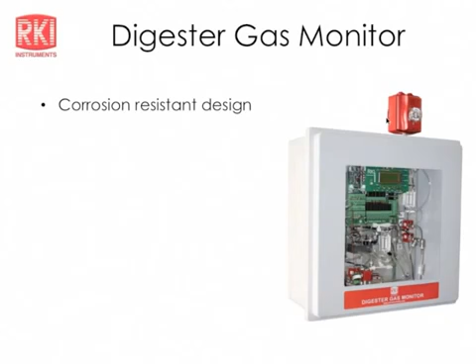So we're going to go through a PowerPoint presentation. You should be able to see that and also see an image of the inside of the digester monitor. We're going to use that to point out some features and benefits as we're going through the PowerPoint presentation. You can see from the picture and also on the screen that it's built into a NEMA 4X box, so it's very corrosion and water resistant. A lot of these applications will be nasty environments.

The main design work on this product was the sample system. The problem there is that many of these gas streams that you're going to be analyzing have very high humidity and high temperature. So a big part of the challenge in the design was to be able to handle those conditions. And I'll go into that in more detail later. We needed to accurately measure very high levels of H2S, much higher than we're used to in safety applications, up to thousands of parts per million.

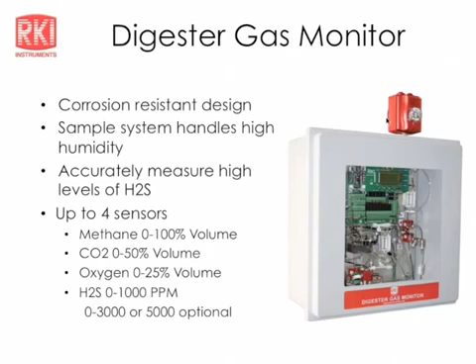And we designed it so that you could have up to 4 sensors installed, including a methane sensor for up to 100% volume, a CO2 sensor up to 50% volume, an oxygen sensor, and then an H2S sensor with 3 ranges available, 1,000, 3,000, or 5,000 ppm. And what we found is that typically the gas coming off of these digesters is around 60 to 70% methane, mostly CO2 as the balance, and then a small amount of H2S. It's large to us, but small in the total percentage of the sample.

We use an aspirator to draw the sample. It can actually draw very long distances, but because of the high humidity in the sample, you generally are going to want to have the monitor as close to the sample point as possible to avoid getting a lot of condensation in the sample line. We have a self-draining moisture trap as part of the water protection system. There's an automatic back flush of the sample system so that if you do get any contamination in there, it'll get blown back out at the end of the cycle.

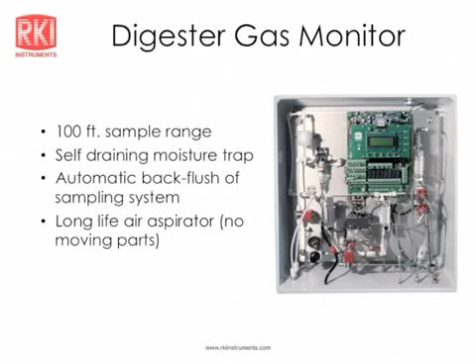I mentioned we use an aspirator rather than a pump to draw the sample. An aspirator is just a mechanical device that you pass compressed air through to create a vacuum. And it's much more durable and long-lasting than a pump would be, especially with the harsh environment we have to deal with. I mentioned before it has a NEMA 4X enclosure, so it's very weather resistant.

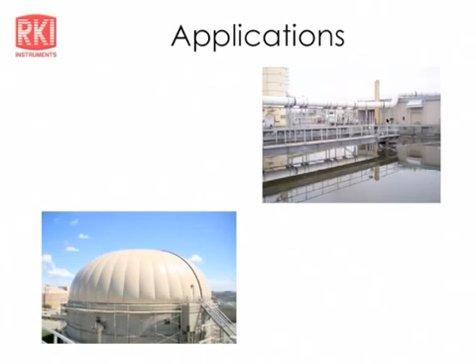Some of the applications that we're looking at, the primary one is for digesters in wastewater treatment plants. And the bottom left image is an actual digester. That dome is actually a dome within a dome. Inside that outer dome, there's actually a membrane that can expand and contract as it fills up with gas. We'll talk a little bit more about that process later. So wastewater treatment plants is a primary application.

Landfills, dairy farms, large-scale dairy farms, and also other animal farms. And animal farm lagoons, which is a nice sounding thing, but it really isn't. It's basically a lake of animal waste that they cover with a membrane and then recover the methane from inside that membrane.

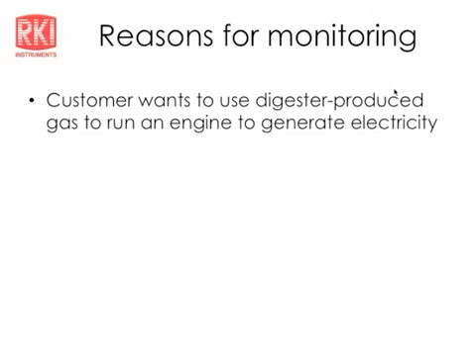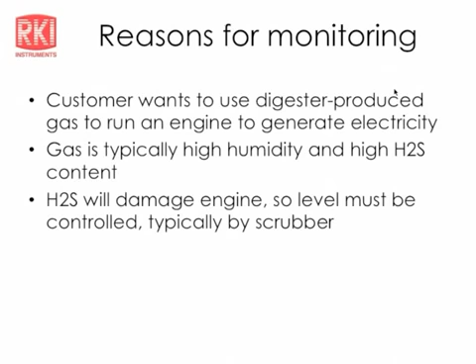So the reasons for monitoring, of course, this is all related to recovering the gas and using it to create energy. So the customer wants to use this gas to run an engine to generate electricity. And this gas is, as we mentioned before, typically very high humidity and high H2S content, which makes it very corrosive. The H2S will damage the engine, so you have to control and remove the H2S. Typically, they'll do this with some type of a chemical scrubber.

And the customer may want to check H2S both at the intake to the scrubber and the exhaust from the scrubber. At the intake so that they know what's going in, because the scrubber has a certain capacity. And if it gets too high, they may not be able to scrub adequately. And I'll talk a little bit more about that based on our experience at our beta site.

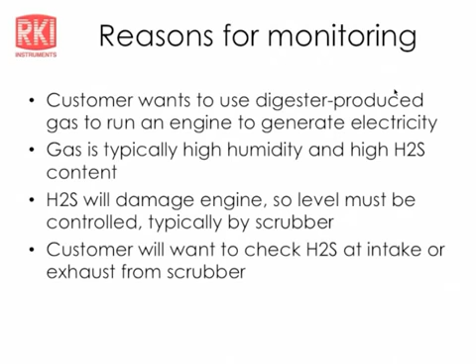They may want to measure the methane level. We originally thought that was the primary reason, but we've found that H2S seems to be the thing that they're most concerned with and most wanting to be able to monitor. But they can measure the methane level also, so they know the quality of the gas and whether it's adequate for running their engine.

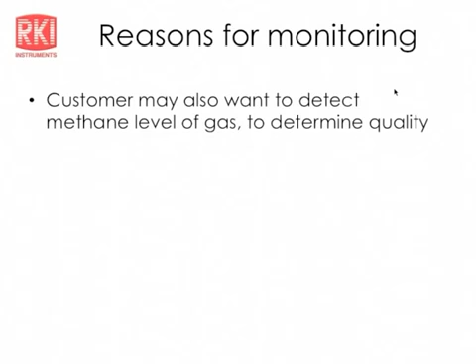They may also want to detect oxygen to prevent an explosion. If oxygen gets into the digester gas, of course, you've got a flammable gas normally with no oxygen. If you get enough oxygen in there, you can have an explosion. Also, if oxygen starts showing up, it could be a sign that their digester is not working properly, and that can be a problem for them. And then if there's air getting in, that can also be a problem. It could be a breach of the system. And again, it could lead to a flammable situation.

You can also measure the CO2 level. Again, we have that capability, so we put it in. I'm not sure how interested all the customers are going to be in that, but we have that capability, and that's the other primary gas that's going to be in the digester gas.

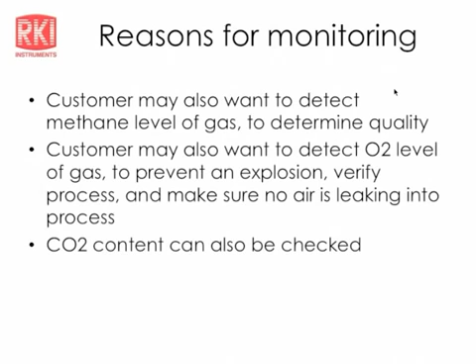Some of the features and benefits. This is the primary one. We know that there are a lot of people that have tried to use more conventional equipment for this application, including us, and it just won't hold up because of the environmental conditions of the gas. So we have a 3-stage moisture humidity control, and I'm going to point that out with a pointer.

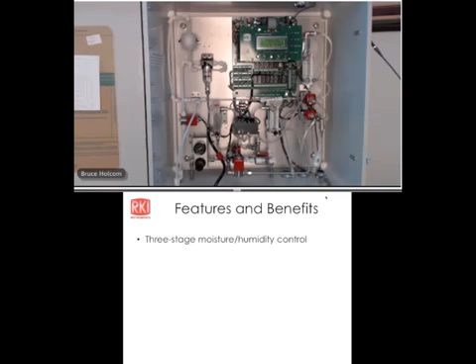And then the third protection is a hydrophobic filter, which, if somehow any condensate makes it past the other traps, will stop it from getting into the sensors and the rest of the system. And I mentioned we have a beta site. They've had their system running for almost a year now, and they've had absolutely no trouble with any kind of moisture problems. So we think the design is doing what it's supposed to do.

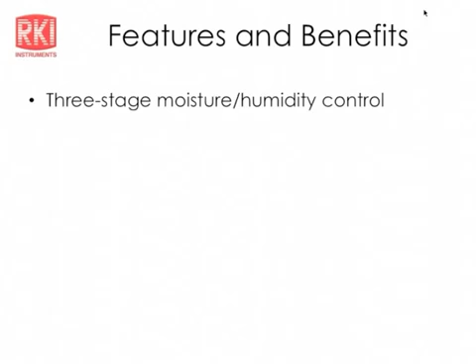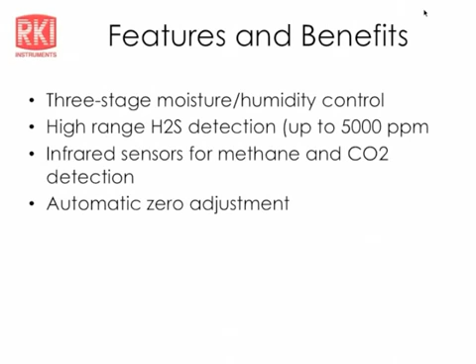As I mentioned before, we have high range of H2S detection up to 5,000 ppm. We use infrared sensors for methane and CO2, so they're not damaged by this bad environment that the sample is producing. One of the really good features about this is an automatic zero adjustment. Every time a sample is taken, the first step is to flush the system with fresh air and zero it, so you have very good zero stability.

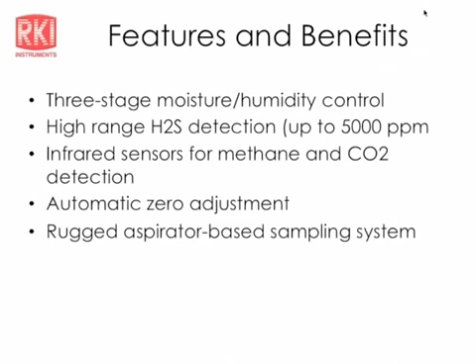I mentioned before the aspirator provides the sample, so there's no pump, no moving parts. Again, very durable and should be a long life system. We do have an option for a horn strobe on it. On the data sheet that we'll pass out later, it shows it with the horn strobe, which can be mounted on the top. I don't know how many people are going to need it because this is really not a safety device. It's not generally an alarm situation. They just want to get the data so they know what to do about their process if it gets out of whack.

You have a user adjustable cycle interval from 15 minutes to 24 hours. And I'll talk a little bit about that. Because of the nasty environment, the H2S and the oxygen sensors will not hold up if they're exposed to the gas continuously. So the whole design is based on a cycle where the cycle starts, it brings in fresh air, makes a zero adjustment. Then it takes a sample, and at the end of that sample time, it holds the reading until the next sample comes.

Then it does a purge to flush out any gas that's in the system, and then it does a back flush to blow air back through the sample system to blow out anything that might have accumulated during the sample time. And again, at the beta site we've had absolutely no problems with that. We've never seen any accumulation of anything in the system. The digester process tends to not be very dynamic, so every user that we've talked to has not had a problem at all with the fact that it's not a true continuous monitor.

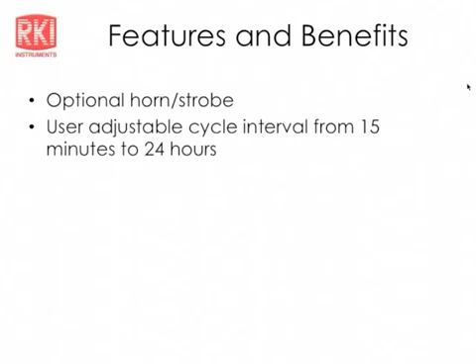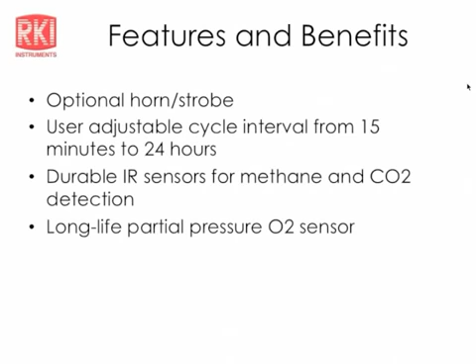The prices might seem high, but let me give you an example of why this is very, very valuable to any wastewater treatment plant that's running a digester. The guys that have the beta site, right before we delivered the system to them, they had been taking samples periodically with Draeger tubes to check the H2S going into their scrubber. And they didn't do it often enough.

And their system got out of whack. Normally they generate anywhere from 50 to a few hundred ppm of H2S. That's kind of normal if everything's working right. Their process went out of whack, and they got up to, they think, about 4,000 ppm without knowing it. And it ran that way long enough to ruin the material in their scrubber. And then when that happened, the H2S gas goes through to their engine, and they ruined their engine.

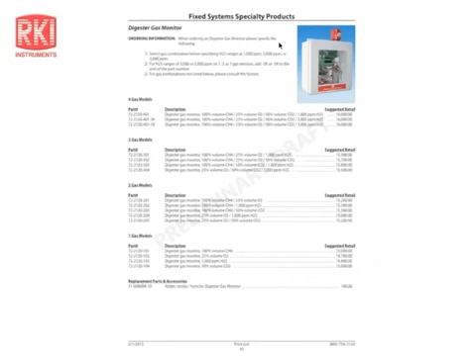So between those two things, it cost them about $75,000 just for that one incident between rebuilding the engine and replacing the material in their scrubber. So one accident like that will more than pay for the system. And they bought their beta unit recently because they've been so happy with it. Is that the one up in Marin? That's the one up in Marin, yeah.

Lenny, do you want to say anything about that? Lenny is here with us live, and it's one of Lenny's customers who also has a lot of our portable equipment up there. Well, the only thing I want to comment, it originated, we had sold them some portables for the confined space program for GX-2012s. And then once they learned that we had fixed systems available, they started to inquire about just a Beacon 410, just a general 4-gas monitor.

And then they asked us, the immediate needs were for this digester fixed system. And I looked at the guy with a funny look. I had no idea what he was talking about. So I called Bruce and got him involved. And he said, "It's funny that you mentioned that. We're in the process of building something very similar to that might work for their setup." So that's how the beta test started.

But after getting going out there, I think Ken's been out there multiple times. I've been out there 3 or 4 times, mainly on the portable side of it, but asking some questions on the digester, how the unit's going during the beta testing. And they had mentioned that it's a project that's very near and dear to them. It's called a FOG project in industry terms. It looks like most of the wastewater treatment plants are doing it. And the FOG stands for fat, oils, and grease.

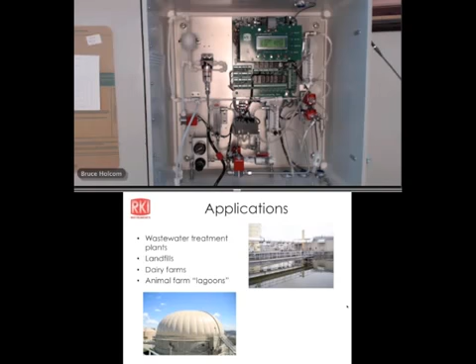There's a couple questions on the board, but I wanted to talk a little bit more about the economics of it. In California, the wastewater treatment plants now are being mandated to recover this gas and use it to generate electricity during the peak hours. And if they don't, they pay a premium for their electricity, and they also get fined. So it's very important for them to run these digesters and generate electricity. And at Marin, where the beta unit is, when their system's running, they actually can generate excess electricity and sell it back to the power grid.

They run the engine during the day when they're consuming the most of their power, and then at night they shut it down and let the gas reaccumulate in the digester storage. If you look at that image on the bottom left, they have one digester that looks exactly like that. They have a second one that was an older one that had a floating roof. And you could actually see in the beginning of the day, the roof would be full, and they would start using the gas to run their engine. And by the end of the day, it would be pretty much empty, and then they would shut the engine down and allow the gas to reaccumulate.

So that's not a hard top then? That one is a hard top, but inside that there's a balloon that basically inflates. So if they don't really want it to get... it can't expand any more than that. Right. So what they do is if their digester engine is not running, then they have to flare the gas off, and they get penalized for that, and they also get penalized for their electricity consumption.

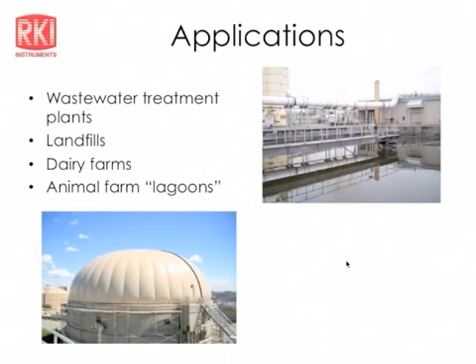Hey, Bruce, I'm sorry. May I ask my question again? Yeah, go ahead. In the limited exposure that I've had to the people in Wisconsin, I've found that there are digester engineering companies, people that are dedicated to the digester business, and they don't necessarily cross over into the landfill business. And we also place calls to environmental engineering companies that do mostly landfill but don't do any digester. Is there an opportunity to discern between different packages? For instance, it's my understanding that landfills primarily want to see percent by volume gas concentrations. And as you stated, the digesters generally are more interested in H2S. Would it be worth our while to understand both those as two completely different applications?

Well, if they're not worried about H2S, they may not need the full digester package. They could use an M2, for instance, with a 0 to 100% methane sensor and an aspirator and do the same thing. The reason for the digester monitor is if they want to monitor H2S or oxygen, you have to use this technique for the sensors to work and stay working and stable.

Well, for that reason, I'm always curious, because the comments that I received from the environmental people is they wanted to dumb down our box. They wanted to take some of what you had in it out, and they would come back to our very basic aspirator with an M2 head and a bypass. Would that be something that we should be aware of when we bring the digester into a landfill or an engineering company for landfills? Yeah, we can always offer them options depending on where they're making the measurement and what they want to accomplish.

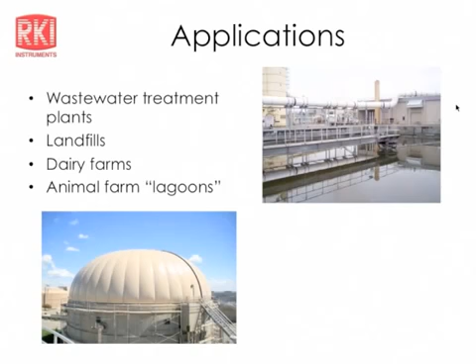Is there a way that we can get a schematic of where these units are placed within the process? Or even a rough draft of where it's placed within the process that you guys have in California? The one in California is pretty straightforward. There's a pipe that runs from the digester to the scrubber, and they're sampling off of that pipe right as it goes into the scrubber. I got a photo I can email the group. Yeah, we can. We've got some pictures that we took that we're going to put together when we do our application brief for this. Excellent.